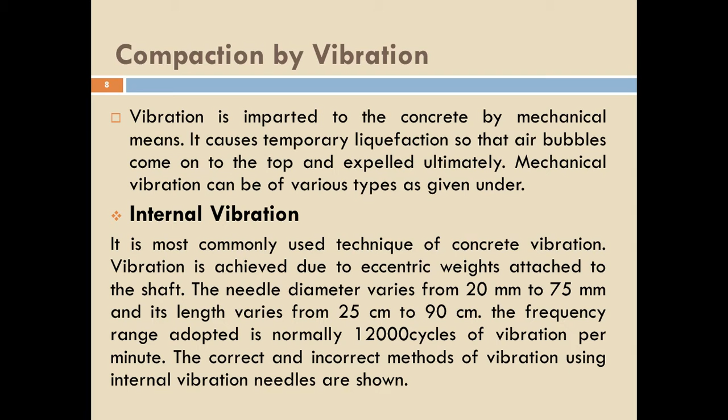This is a needle vibrator. I hope most of you have seen this at the construction site. When compacting by means of a needle vibrator, you'll be placing the needle at different locations.

When placing a needle vibrator at different locations, you cannot place it just as you want. The needle vibrator has to be placed at equal intervals; then it is the correct method of vibrating the concrete.

Also, the needle vibrator should be straight enough. The needle should not be in an inclined direction; it should be sufficiently straight.

While compacting at different points, the points should be of equal distance. When placing the first point to the second point, the distance should be the same. Similarly, when compacting at the third point, the distance between the second and third should be the same. In that way, we have to compact the concrete by means of a needle vibrator. That is the correct method.

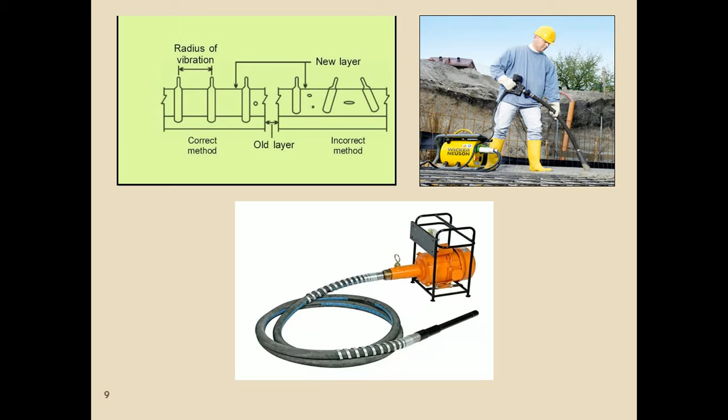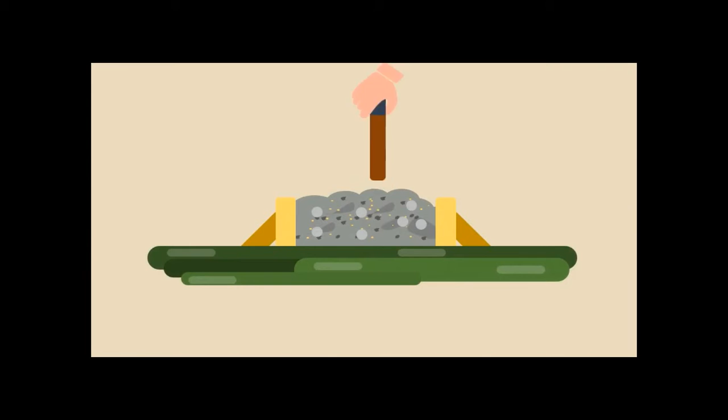Compaction by vibration: even though compaction by hand gives satisfactory results, the strength of hand compacted concrete is low as it requires a higher water-cement ratio.

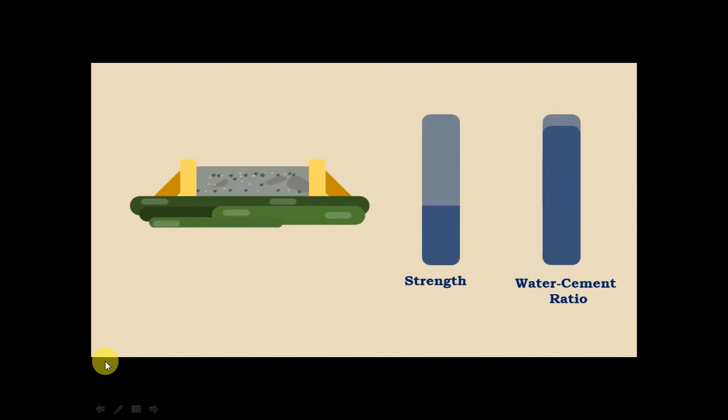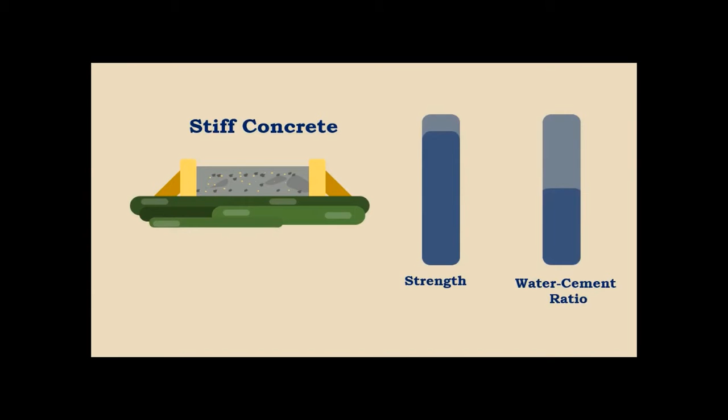To obtain high strength, it is important to use stiff concrete with low water-cement ratio. For compacting this type of concrete, mechanically operated vibratory equipment should be used. The modern high-frequency vibrators can even be employed for vibrating concrete in places where hand compaction cannot be employed.

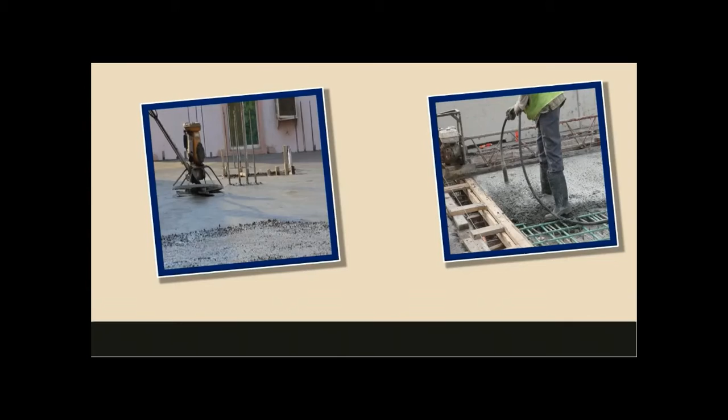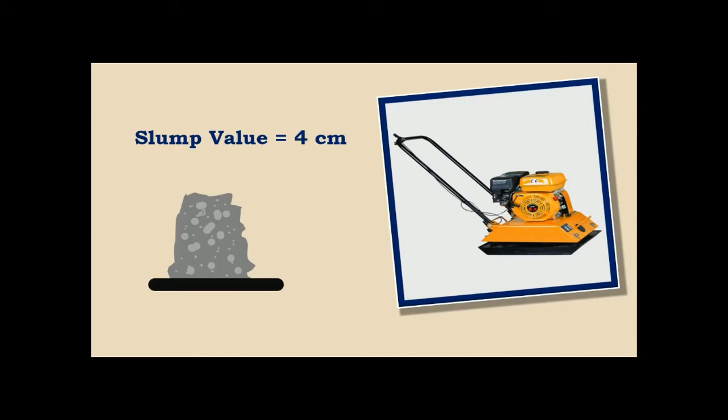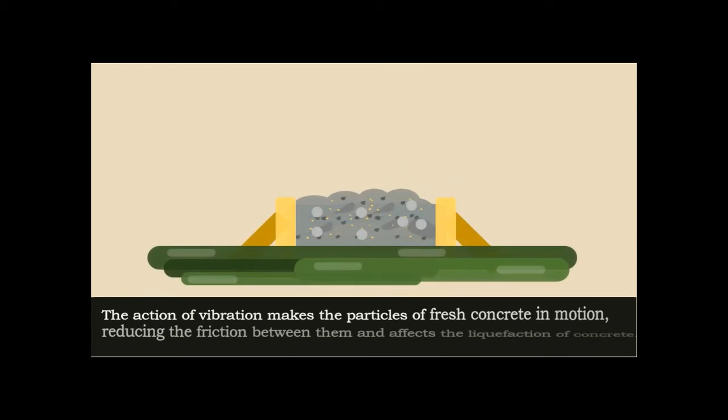For example, concrete with about 4 centimeters slump in closely spaced reinforcement can also be compacted by vibrators, whereas hand compaction requires a much higher slump value of about 12 centimeters. The action of vibration makes the particles of fresh concrete move, reducing friction between them and causing liquefaction of the concrete. This enables easy settlement.

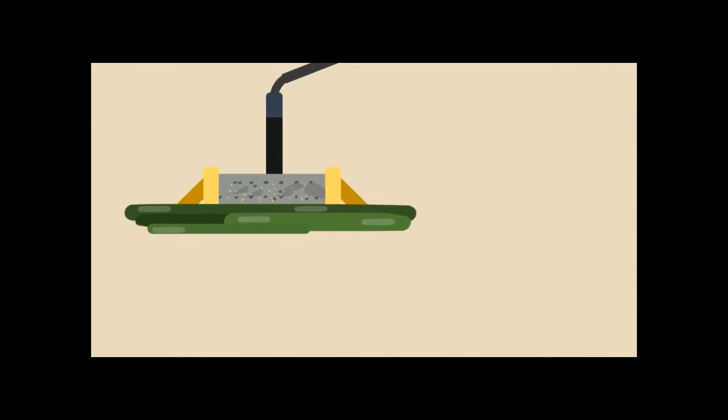Compaction by vibration is an economical way of compacting concrete with a lower water-cement ratio. Apart from low water-cement ratio, compaction by vibration is advantageous in places of congestion of reinforcement, inaccessibility of concrete in formwork, and where poor shape and texture aggregates are used.

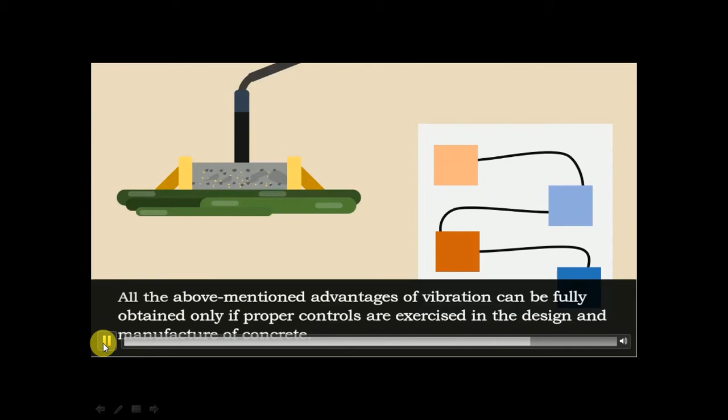Perfect compaction by vibration not only increases the strength of concrete but also increases the durability of structures. All the above-mentioned advantages of vibration can be fully obtained only if proper controls are exercised in the design and manufacture of concrete. There are different types of vibrators employed in construction.

There are different vibration methods. In this we have studied about the internal vibrator, so we'll move on to the next type.

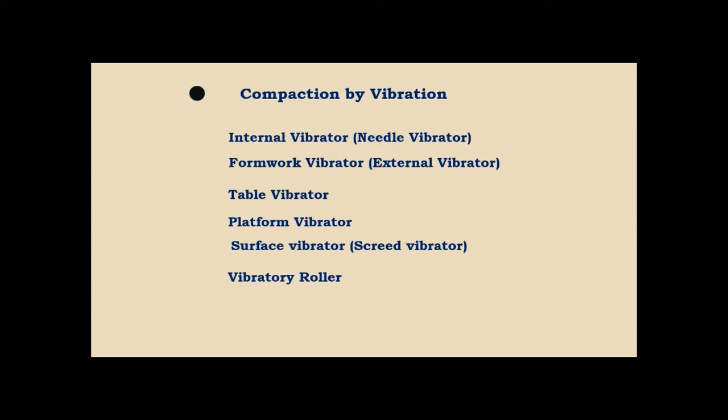The next type is external vibration, also called formwork vibrator. These formwork vibrators are generally used for concreting columns, thin walls, or precast units.

When there is difficulty in placing the concrete or compacting it from inside—due to congestion of reinforcement, heavy reinforcement, spacer bars, stirrups, or any congestion of reinforcement from inside—then you can compact the concrete from outside by clamping the machine onto the external surface of the formwork.

So by this way you can compact the concrete. This is especially used in columns, thin walls, or precast units. This method is adopted when there is difficulty vibrating the concrete from inside, such as congestion in the reinforcement, lateral ties, or spacer bars that interfere too much with the needle vibrator.

External vibration is less effective and consumes more power compared to internal vibration. This kind of compaction is done externally through the formwork, which requires a lot of power since the concrete has to be vibrated through the formwork, and the formwork itself should be sufficiently rigid to take up the external vibration. This method is found to be not economical.

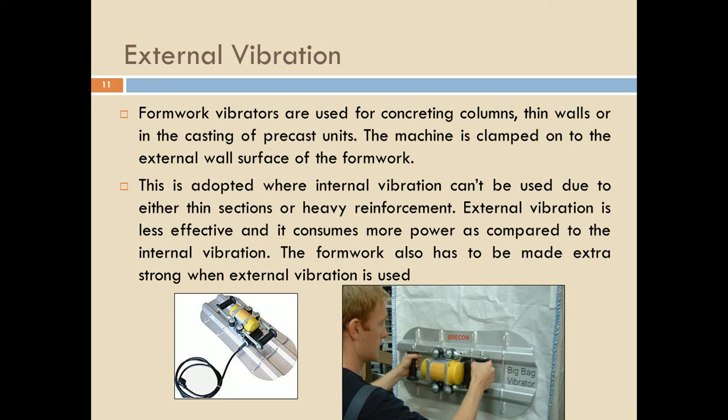You can see in the picture how vibration is given to the concrete by means of a formwork. We have a small video on formwork vibrator for compaction of concrete.

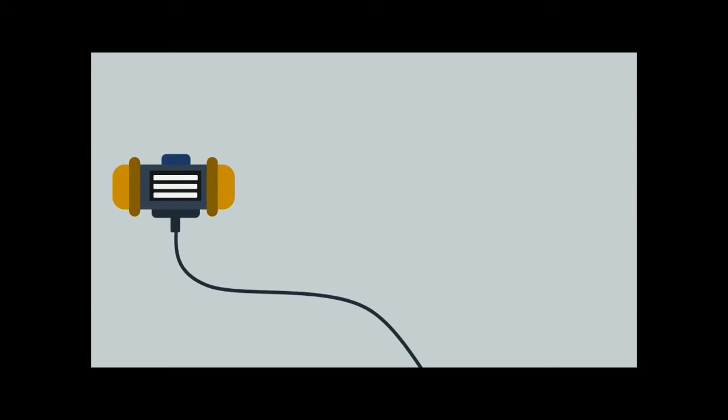Formwork vibrators are also called external vibrator or shutter vibrator. Formwork vibrator is generally used for concreting columns, thin walls, or in the casting of precast units.

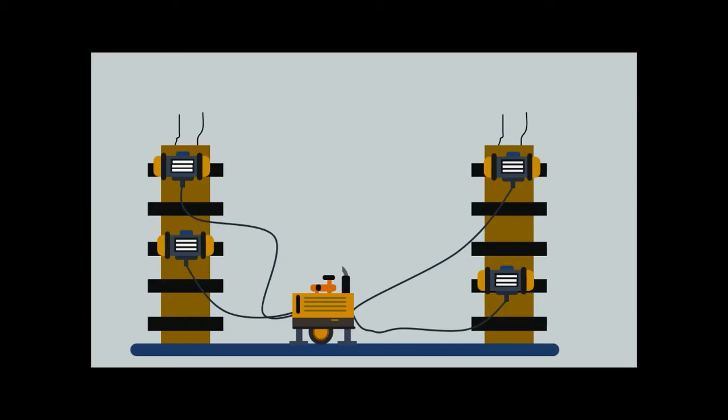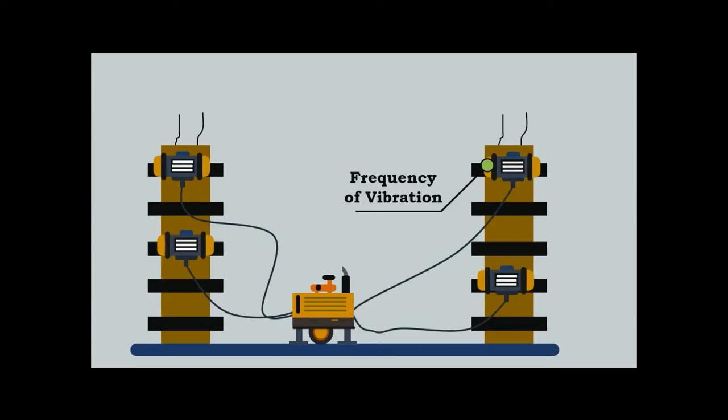The formwork vibrator machine is clamped onto the external surface of the formwork. The vibration is given to the formwork so that the concrete present in the shuttering gets vibrated. The compaction time of formwork vibrators is generally between 1 to 2 minutes. These vibrators operate at a frequency of 3000 to 9000 cycles per minute.

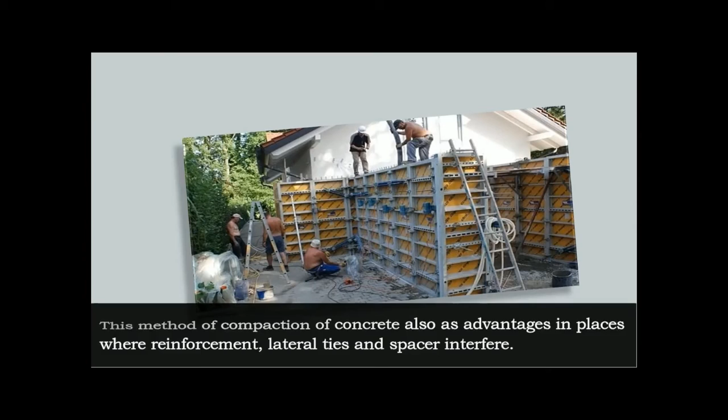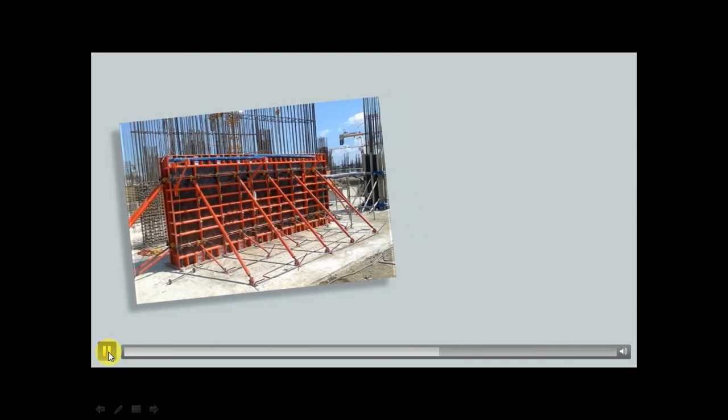This method of compaction also has advantages in places where reinforcement, lateral ties, and spacer interfere. The use of formwork vibrator also produces a good finish to the concrete surface. The shuttering and formwork used should be rigid, strong and watertight to withstand the vibration caused by the vibrator.

As the vibration of concrete is given indirectly through the formwork, the vibrator requires more power, and the efficiency of an external vibrator is lower than the efficiency of an internal vibrator.

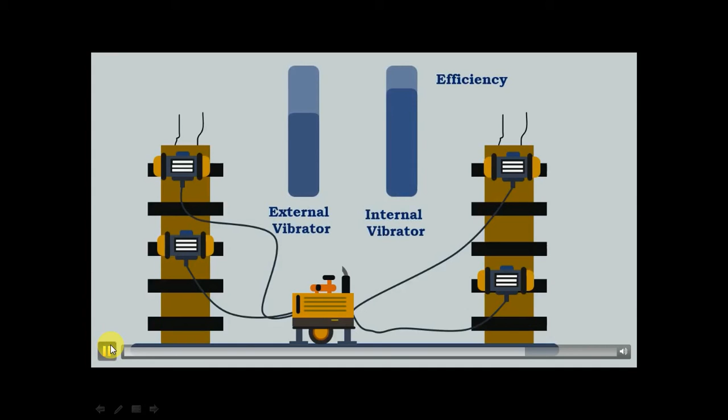Next video is on table vibrator.

I hope you understood about external vibration. Next we move on to table vibration. This is a special case of formwork vibrator, mainly used in laboratories where concrete cubes are usually put on a table. A vibrator is clamped to the bottom of the table, which is also mounted on springs in four directions. By means of the vibrator, the springs transfer that vibration to the concrete cubes placed on the table. Usually this is of a small scale.

This can be used in college laboratories or in the RMC plant where you will be casting four or five cubes at a time. You can keep around 4 to 5 cubes on a table where the area of the table is small. That's why these kinds of table vibrators are used in laboratories.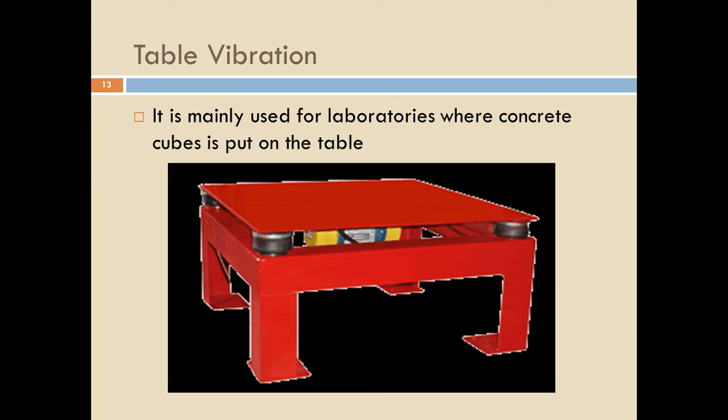Table vibrator for compaction of concrete is a special case of formwork vibrator, where the vibrator is clamped to the table.

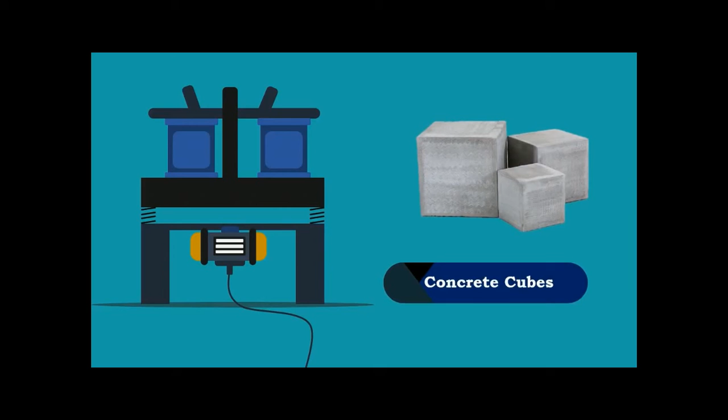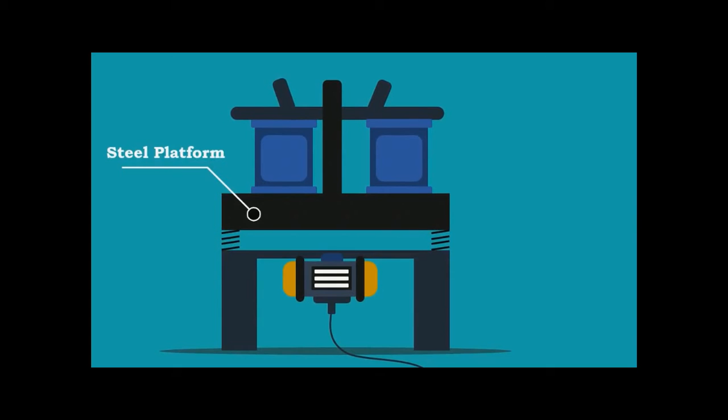They are commonly used in laboratories and factories for compacting concrete cubes and prefabricated elements. The vibrating table consists of a rigid-built steel platform mounted on flexible springs and driven by an electric motor. The concrete molds are clamped on the table and allowed to vibrate.

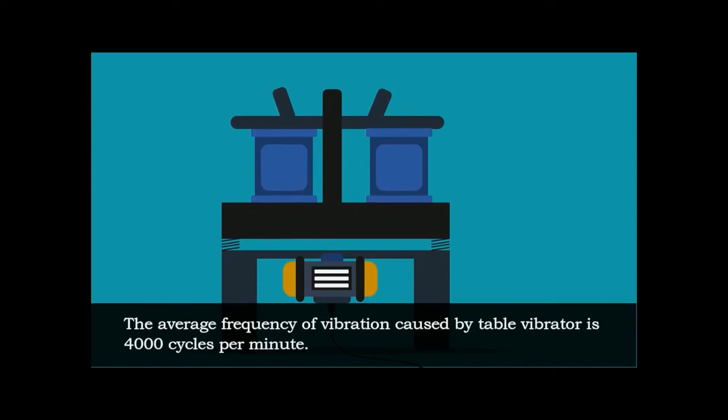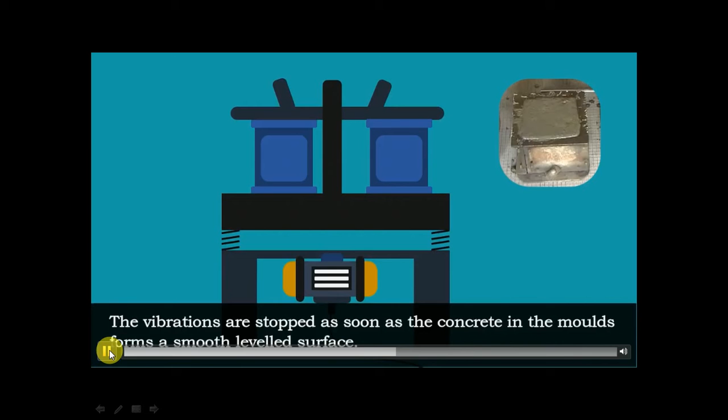The average frequency of vibration caused by table vibrator is 4,000 cycles per minute. The vibrations are stopped as soon as the concrete in the molds forms a smooth leveled surface. However, the medium workable mixes require a higher frequency of vibration than stiff mixes.

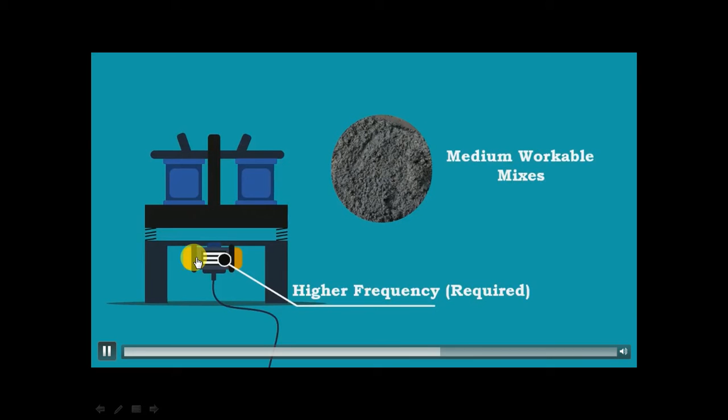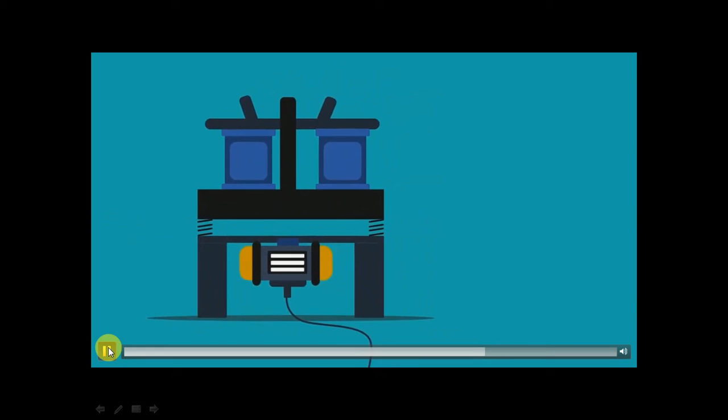In this case, a high-frequency vibrator is mounted on the table. The vibrating tables are found to be very efficient in compacting stiff and harsh mixes which are used in the manufacture of precast elements.

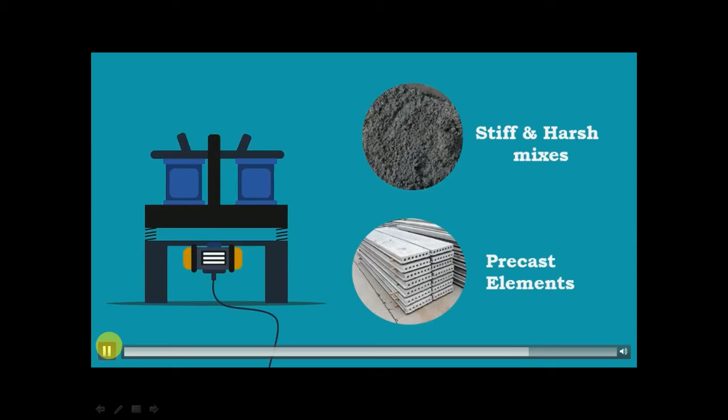Even in almost all the colleges, these kind of vibrators will be there. So that is a table vibrator.

If the concrete is sufficiently stiff, or if the concrete is having a low water cement ratio, except for high water cement ratio concrete, for all other types of concrete, these kind of table vibrator can be easily used in the laboratories for small scale tests. If you are doing some small tests with the concrete, then these kind of vibrators can be easily used, except for concrete having a high water cement ratio.

So next we'll move on to the platform vibrator. This kind of platform vibrator is quite similar to a table vibrator, but it will be large in size because this kind of platform vibrator is used for large scale works.

Especially in the construction of prefabricated elements like precast electric poles, precast railway sleepers, prefabricated roofs, or any other precast elements that we are going to construct, platform vibrators can be easily used because it will be of large size.

It is just like a table vibrator only. At the bottom there will be a vibrator connected to the bottom of the table. Then this rigid plate which is there is mounted on the spring. Through the vibrator, through the springs, the table will move up and down. In that way the concrete will be vibrated.

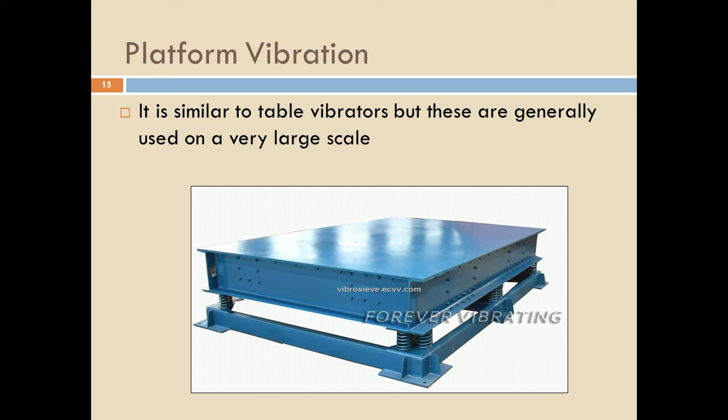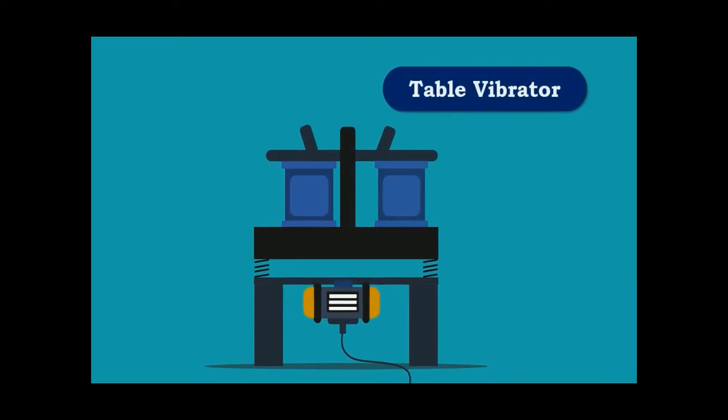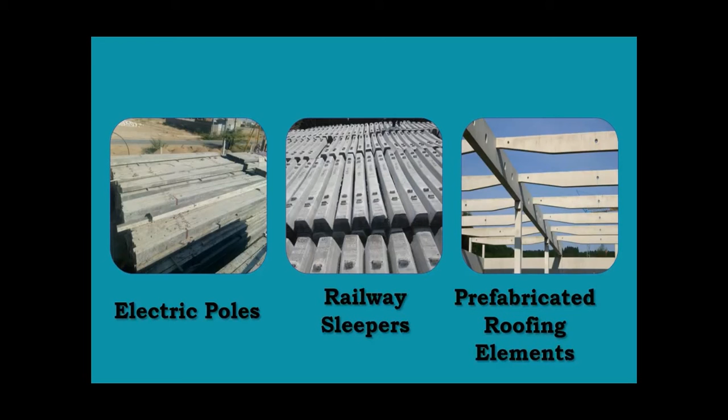Platform vibrator for compaction of concrete. Platform vibrator is nothing but a table vibrator, but it is larger in size. This type of vibrator is used in the manufacture of large prefabricated concrete elements such as electric poles, railway sleepers, prefabricated roofing elements, etc. The large vibrating table consists of a rigid-built steel platform mounted on flexible springs and driven by a number of electric motors.

The average frequency of vibration caused by platform vibrator is 4,000 cycles per minute. The vibrations are stopped as soon as the concrete in the molds forms a smooth leveled surface.

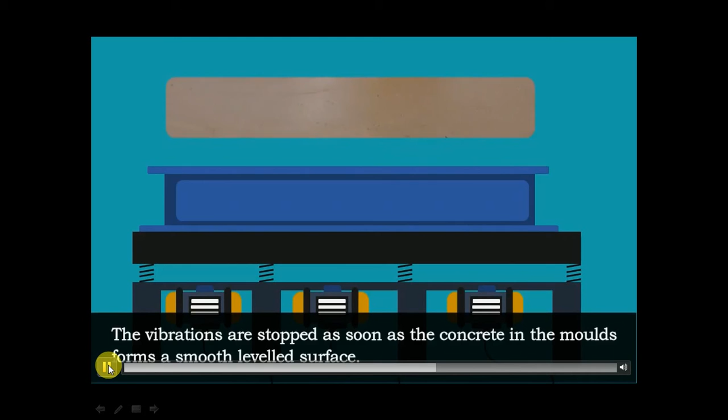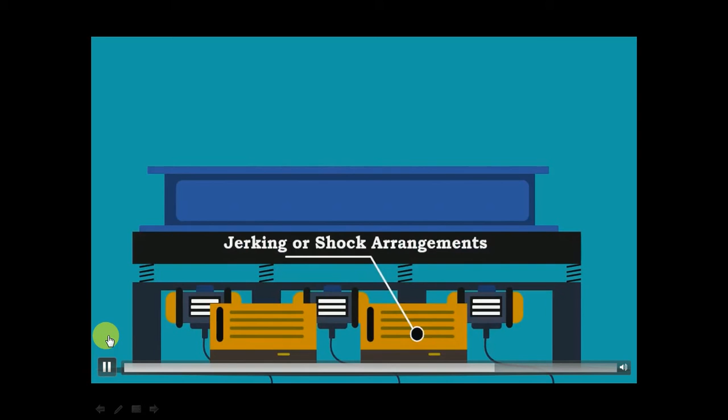Sometimes, the platform vibrator is also coupled with jerking or shock-giving arrangements such that a thorough compaction is given to the concrete.

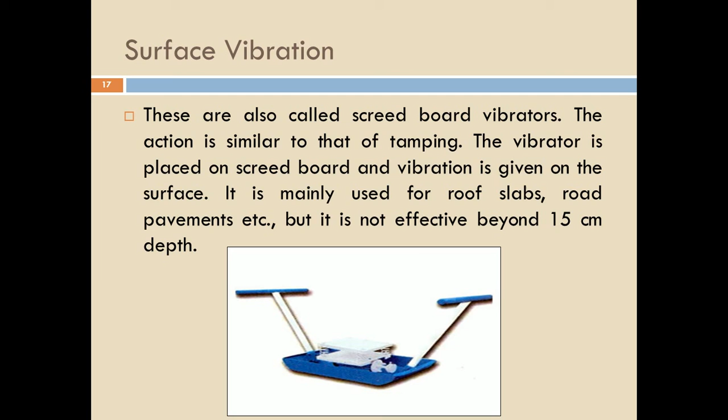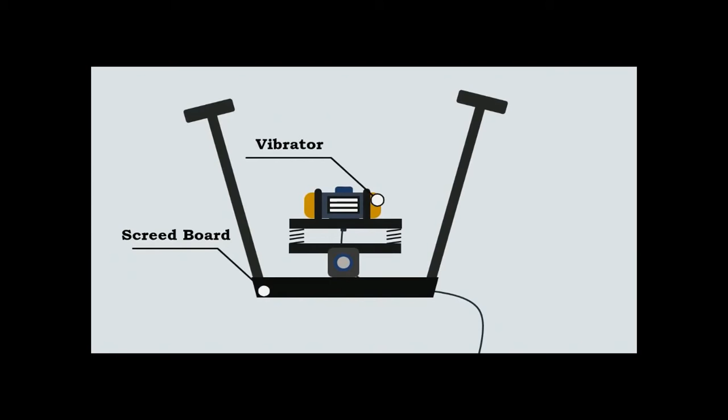Surface vibrators for compaction of concrete. Surface vibrators are also called screed board vibrators. The surface vibrators consist of a small vibrator placed on the screed board, which is used for compaction of concrete for floor slabs, roof slabs and road surface.

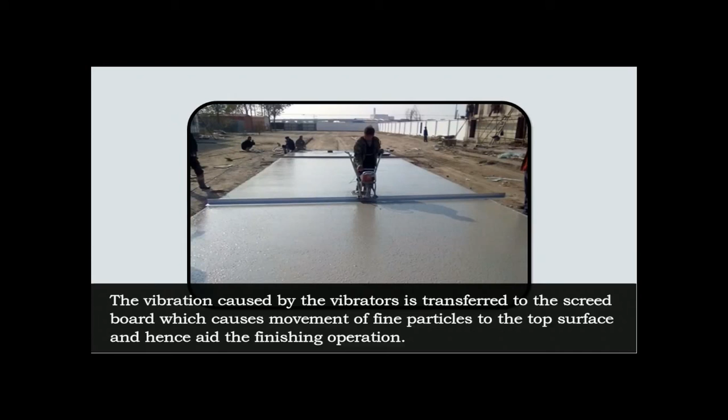The vibration caused by the vibrators is transferred to the screed board, which causes movement of fine particles to the top surface and hence aids the finishing operation. The operating frequency of the surface vibrator is 4,000 cycles per minute.

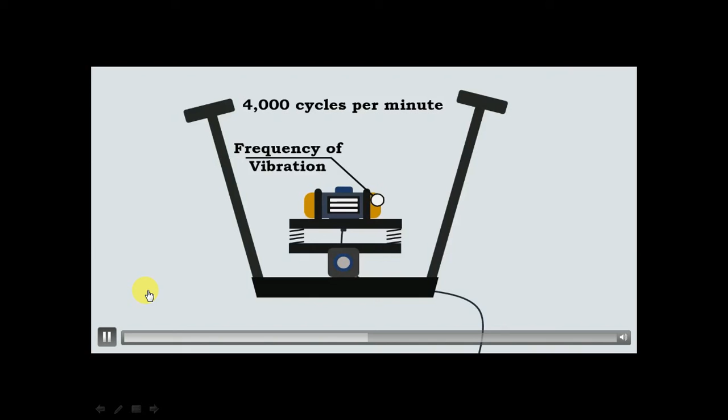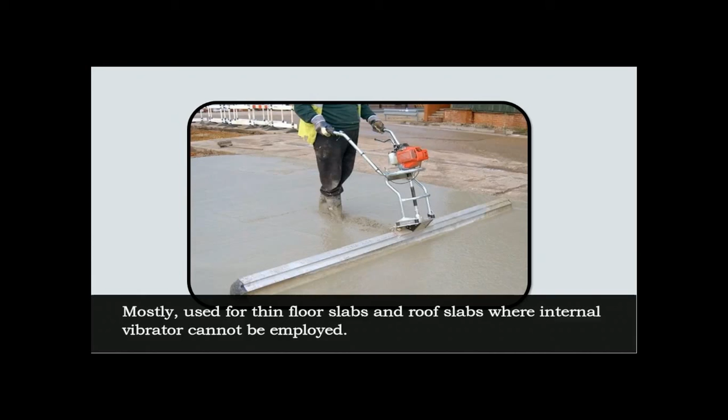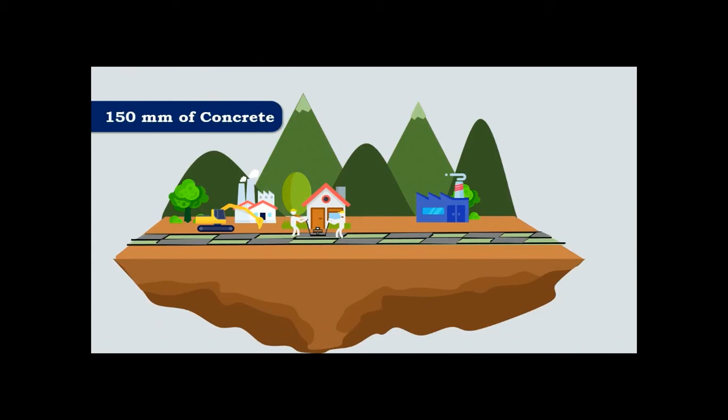Surface vibrators are mostly used for thin floor slabs and roof slabs where an internal vibrator cannot be employed. These vibrators are effective only up to a thickness of 150 millimeters of concrete. Most commonly, surface vibrators are used in the vacuum dewatering technique or the slip form paving technique.

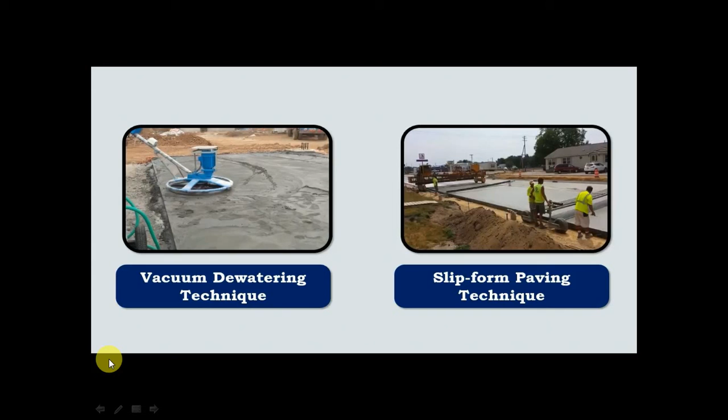This is regarding the surface vibrator or screed board vibrator. Next we have two special cases for compacting: one for concrete blocks, and another for concrete pipes. First we'll see compaction by means of pressure and jolting.

This is one of the effective methods of compacting concrete. If the concrete is very dry, this is a good method, because it gives the combined action of both jolt vibration and pressure. So even if the concrete is very stiff or has a low water cement ratio, because of these two combined actions of pressure and jolt vibration, the concrete will be compacted to give good strength and volume stability.

This method is often used for compacting hollow blocks, cavity blocks, or solid concrete blocks. This type of compaction is usually used in the block industry where manufacturing of blocks is done, especially where concrete blocks require compaction. The advantage is that even if the concrete is very dry, you can easily compact it to get good strength and volume stability. By employing great pressure, concrete of very low water cement ratio can be compacted to achieve good strength and volume stability.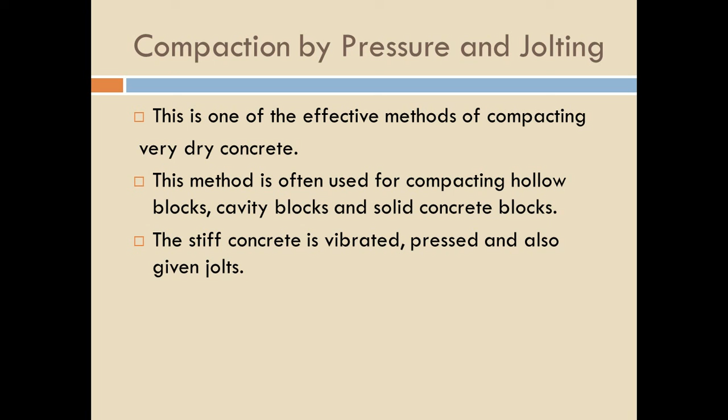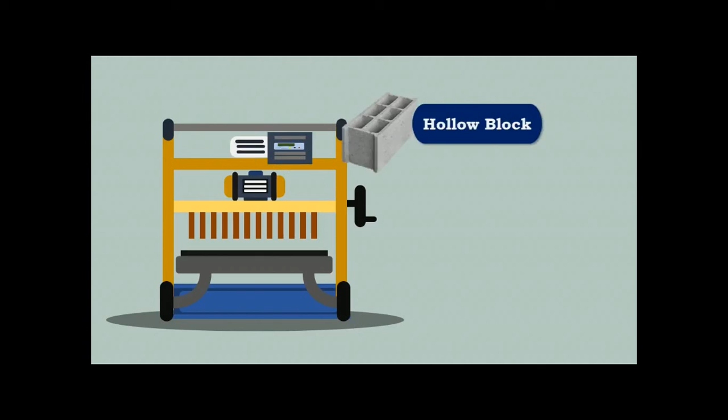Compaction of concrete by pressure and jolting is commonly used for compacting hollow blocks, cavity blocks, and solid blocks. This is one of the effective methods of compacting very dry concrete.

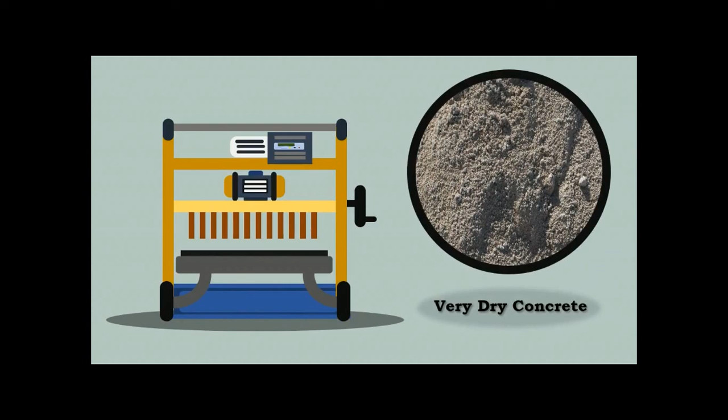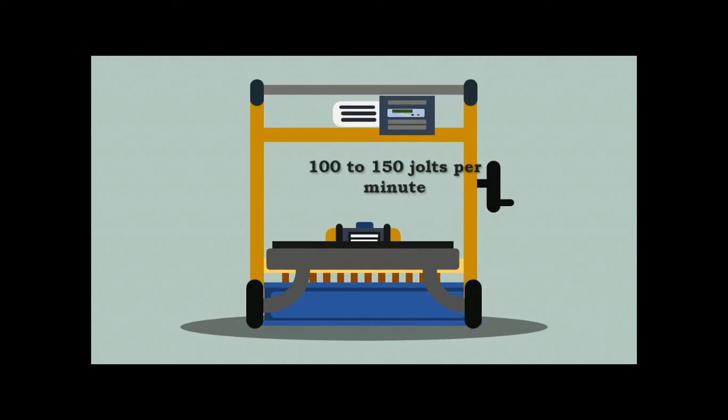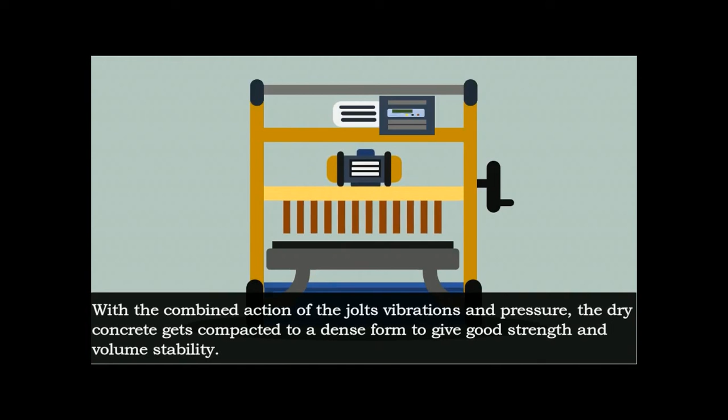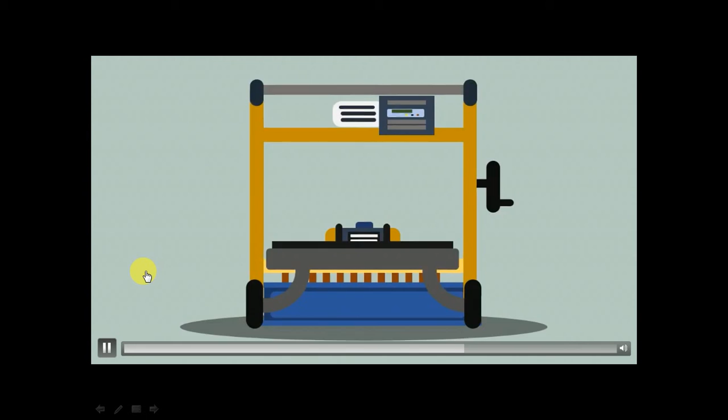The dry concrete is vibrated and pressed, with a vibrator provided with clearance at the top. A frequency of 100 to 150 jolts per minute is applied, and at the same time pressure is also given. With the combined action of jolts, vibration, and pressure, the dry concrete gets compacted into a dense form, giving good strength and volume stability. By adopting this technique, concrete with a very low water cement ratio can be compacted to obtain the required strength.

The last method is compaction by spinning.

Compaction by spinning is usually done to compact concrete pipes, that is, hume pipes or spun pipes. Spinning is one of the recent methods of compacting concrete. This method is usually adopted in the prefabrication of concrete pipes, where the concrete is spun at very high speed. Due to that high speed, by means of centrifugal force, the concrete gets compacted. This is one of the recent methods used to compact concrete, especially in precast concrete pipes.

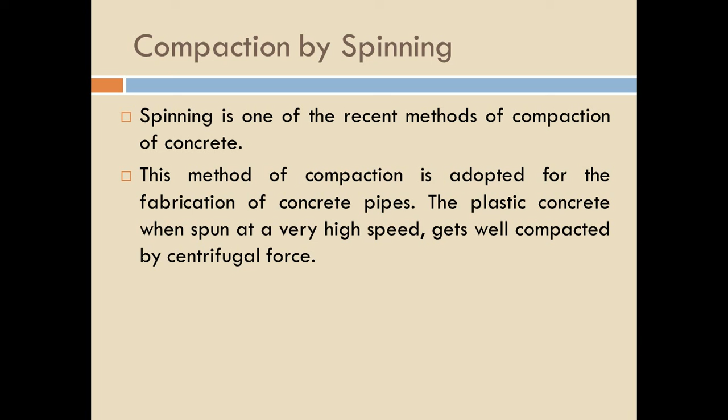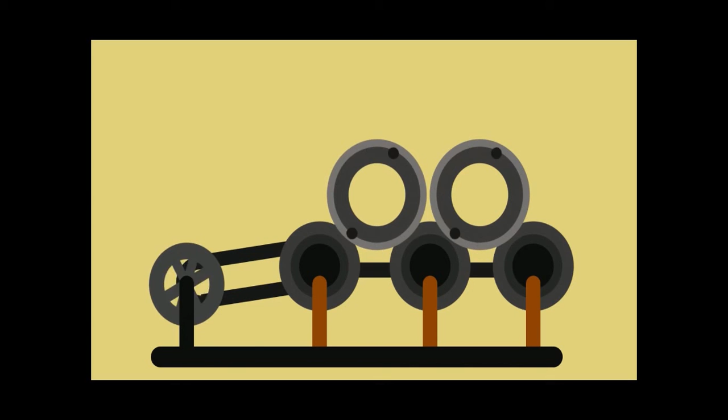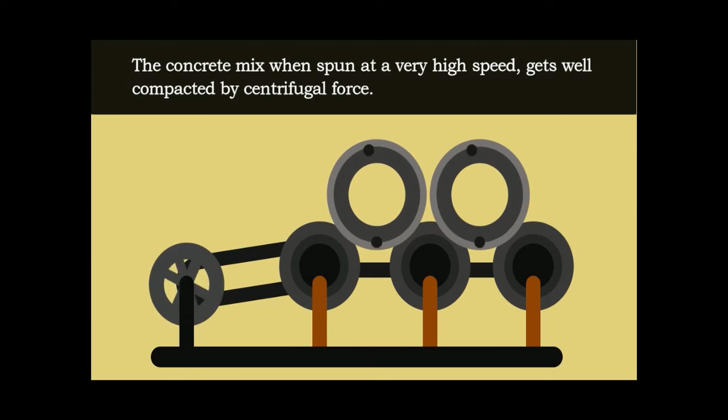Compaction by spinning is one of the recent methods of compacting concrete. This method is commonly adopted in the manufacture of concrete pipes. When rotated at high speed by spinners at the bottom, the concrete mix gets well compacted by centrifugal force.

Hume pipes, spun pipes, etc., are common examples of products compacted by the spinning process.

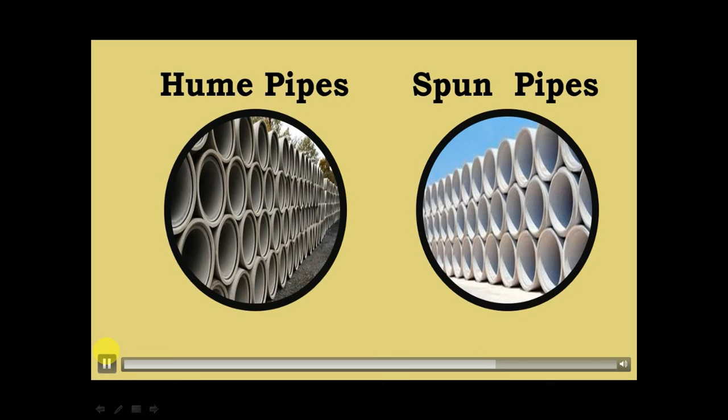This covers compaction by means of vibration or mechanically operated methods. We have studied the different methods of mechanically operated vibration. Based on our site conditions, we can use different methods to compact the concrete. I hope you understood about compaction by means of vibration.